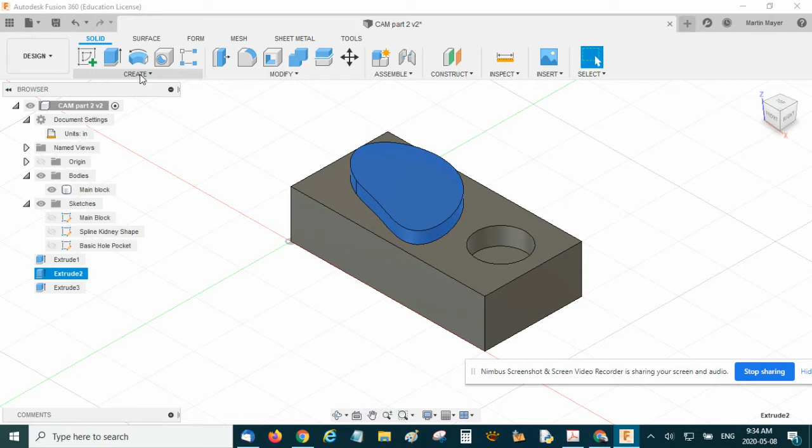to do the simulation. On the top of the block, I did this extrusion. To do that, all I did was go into, where is it? Sorry. I went into here, and under sketching, I used the spline tool. You could just click around, and I just made this funny kidney shape just for something different. So I could do that. And then I did another sketch. Oops, somehow I got that one. I didn't want the final sketch. And then I just put a hole in it over here.

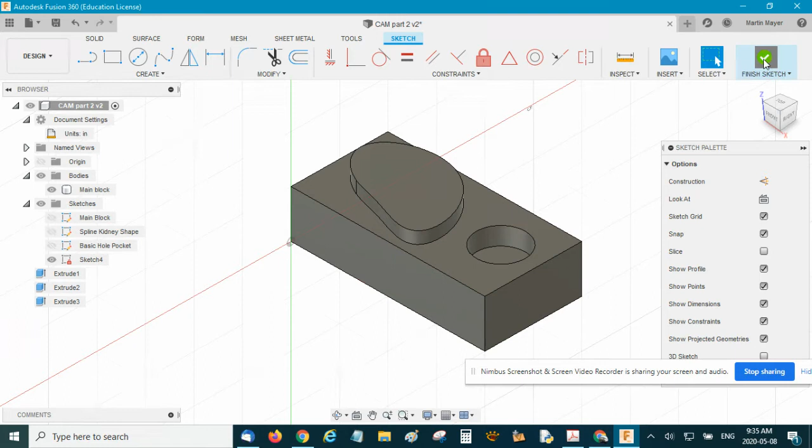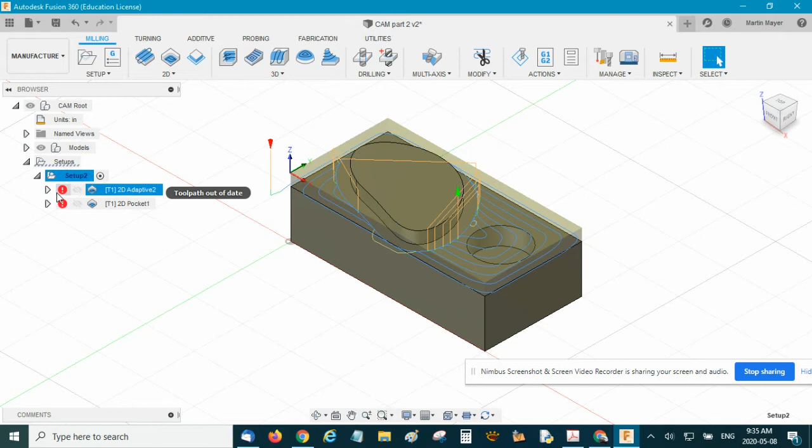So something raised out, extruded out, and something extruded in or cut in. That's it. Because I wanted to show some different types of machining in the CAM features, I made something going in and something sticking out. Go down to manufacturing. I've already set it up. It looks like I have some errors. I probably have to regenerate.

Reminder, in the manufacturing, you're looking for the CAM part. They call it manufacture, but it's really the CAM part where you can simulate the machining. You have to go do a setup, so I already did that. For now, we're not going to pick the type of machine, but we're going to do a milling operation, okay? And now you can sort of see, and I've got it, I think, set right. You see that shadow box? That's that stock box idea.

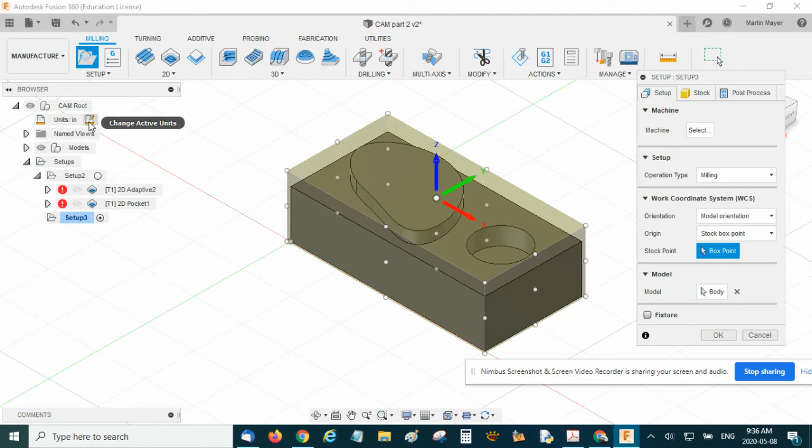Again, the final shape has all these features, but you'd have to start with a chunk of aluminum the size of that stock. And then we machine away all these things, and we get the kidney sticking out. And we keep machining, and we get that hole in here. So that was the reason that I had that stock box set up. Remember, when you go into manufacture, you have to change the units into inches. Something I noticed when I was playing around, you could actually set the default, and it seems to stick. So I don't know why I didn't see that before, but there is a default, so when you jump in from now on, it is there.

Okay, so you have to do your setup like we did before. Set up your stock box. I said it wrong, I guess. My box is 4 by 2, so it's 4 inches long, 2 inches, and it was an inch high, but I extruded that up 1/4 of an inch, so that's why the height of my stock is 1 1/4 inch, that gray box, because that's the piece of material that I'm going to start with.

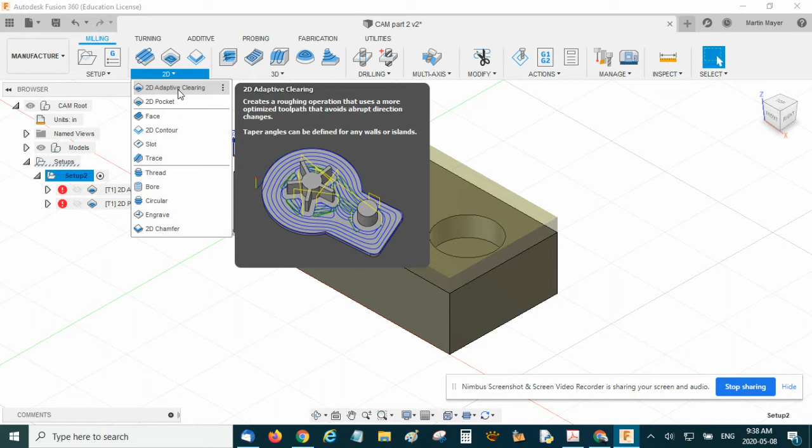Where am I? The next thing that I did is I went in and I set what I wanted to machine. So I actually did 2 of them, one for the kidney and one for the hole. And I went in here because I know I'm doing 2D machining. What I like about Fusion, when you hover over, it gives you a picture of what that kind of cut would do. So it's a little bit of a tutorial slapping you in the face. And I noticed right away they have this one called adaptive clearing. It creates a roughing operation. It just sort of clears everything out of the way that you don't want, so you can get into the shape that you want.

So that was the one I used to get my kidney shape. And then the pocket cut goes inside a shape, so that was the one I used down here. So you'll see them here, that 2D adaptive. You see when I hover over, it kind of shows you where it's going to cut. And then when I do the pocket, it shows where it cuts. So when I clicked on here, if you chose it, you would get this box to pop up.

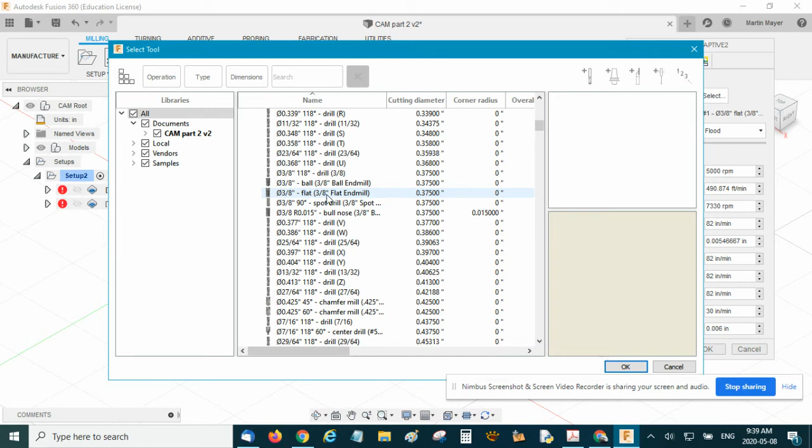This tool thing is kind of weird. If you go to the whole library, there's so many tools there. But basically, it's sorted by size. And I went down and picked around a 3/8, and I think it was here, a flat end mill, 3/8 diameter. See that little diameter symbol? 3/8 flat, diameter. A ball end mill has an end here; you can see that it's like a ball. That's not what we want. Flat end, I want the flat. Okay, so I had already chosen it here, and it shows it with the tool holder in place.

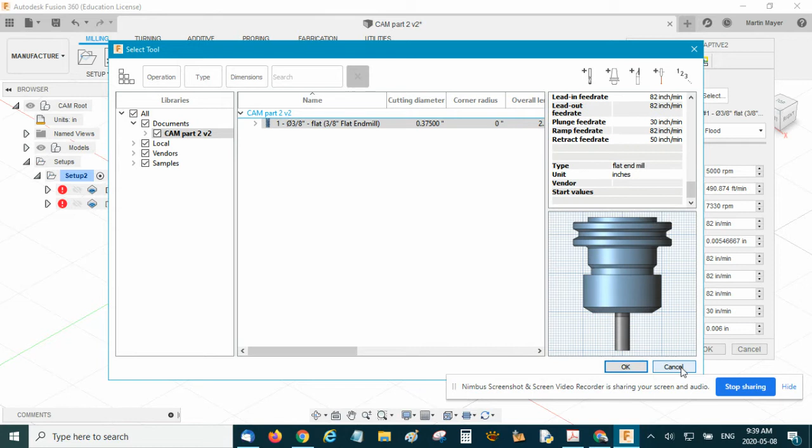And all of the parameters for it, you can play around there, but I didn't bother. I set my spindle speed for 5,000 because that worked nicely for the Tormach machine in our classroom.

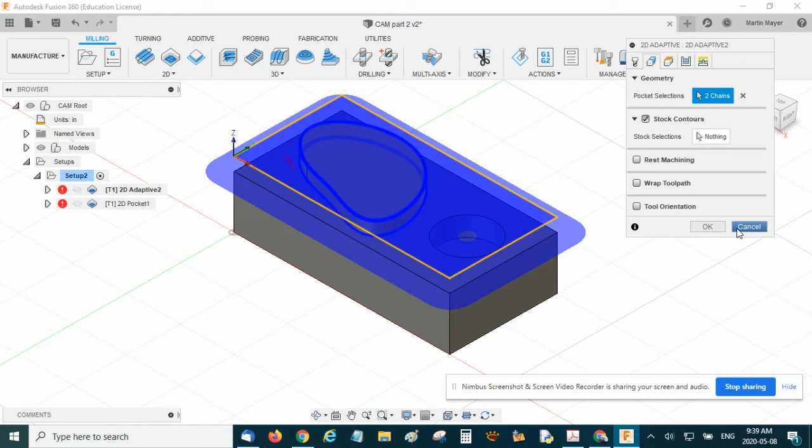Geometry, again, I picked the geometry and I used the stock box idea, what I wanted to cut around. So you can play with that. Again, I'm not an expert at it, but it's kind of a finicky thing, but it did work.

Once I had the parameters set up, I ran the simulation. In the simulation, you don't have to, but I like my tool to be transparent, kind of just softens it up. And the stock, I had it show, so when you click that, you see the stock box. That's the piece that you would start with if you started in the shop.

And then material, like the ceramic - I played with it, somehow the ceramic looks better. And colorization, I thought the material colorization looked better. If you like the colors, you can do that, doesn't really matter. And I made it transparent so I can kind of see the features I'm hunting for. They're in there, I remember what they're at.

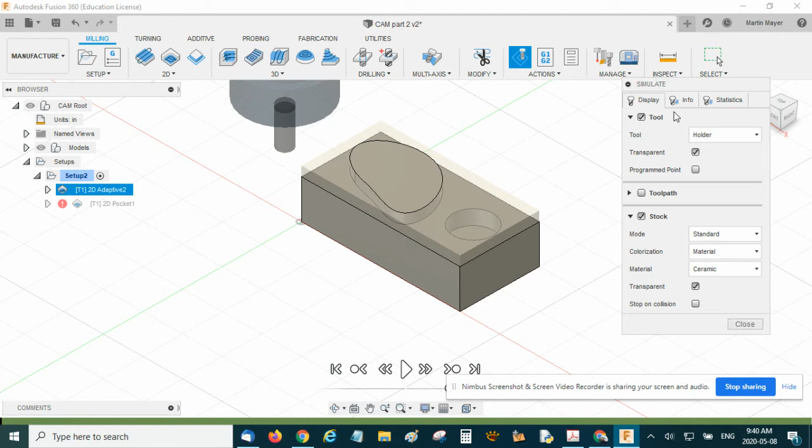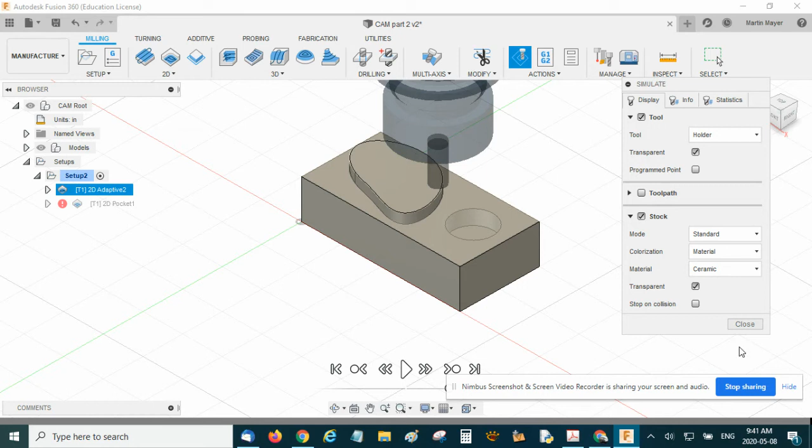When you're in the simulation, you can cut, and it kind of shows, like VCarve, oh, that material is disappearing as you go. And then when it's done, presto, there's my kidney shape sticking out, and that stock material has been machined away. Okay, so that's a kind of a neat way to see that. I think I have an error here because I didn't regenerate after coming back.

The last thing I want to show, I'm not going to show you how I did this, I'm going to let you figure that out. I'll give you a clue: make sure when you do your pocket cut, you go right to the bottom of the pocket. The first time I did it, I picked this circle and I only cut to there, it didn't actually put the hole in. So I had to go back and modify - I want to cut down to that contour in the pocket.

So watch that. For this toolpath, I'm going to do one more thing. There's a feature here called post-process. Remember we talked about that with VCarve, the idea that you're going to send your file on through a post-processor, a translator, and that's going to convert it into the G-code.

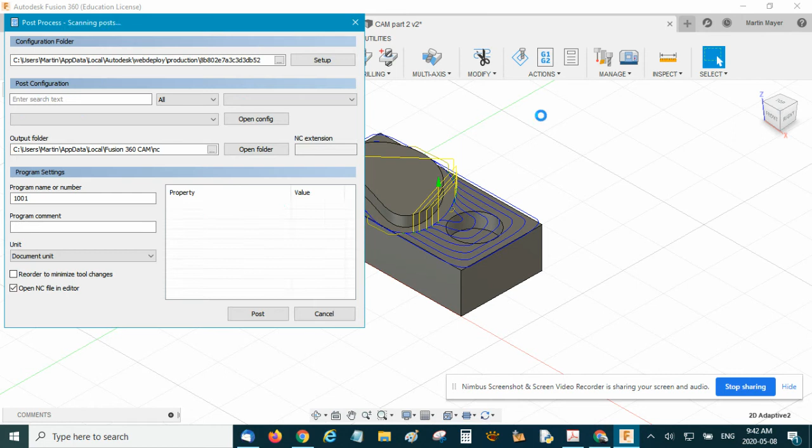I'm not an expert at this, but in the post-process, you can set where the file is going to go, and then post-configuration. I went here, there's all the different types of machines that are available. Well, we're doing a milling machine. And under here, all vendors, meaning all the different kinds of companies that make milling machines.

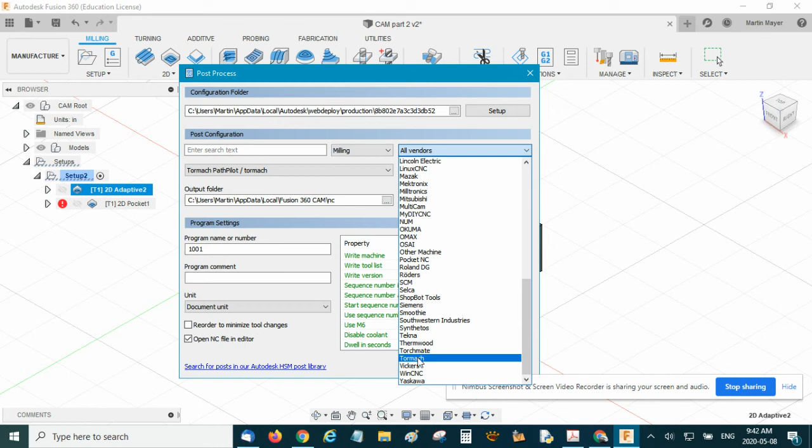And there's Bridgeport, used to be a big player when they made them years ago. But way down at the bottom is the one that's in our school, it's called the Tormach. So that's the post-processor that we want.

It goes to this folder, and right here I put in TMJ Mayer first try. It's going to make a CNC G-code file in this funny folder, this extension. Remember in VCarve the extension was TAP, a TAP file. It's just different, that's all.

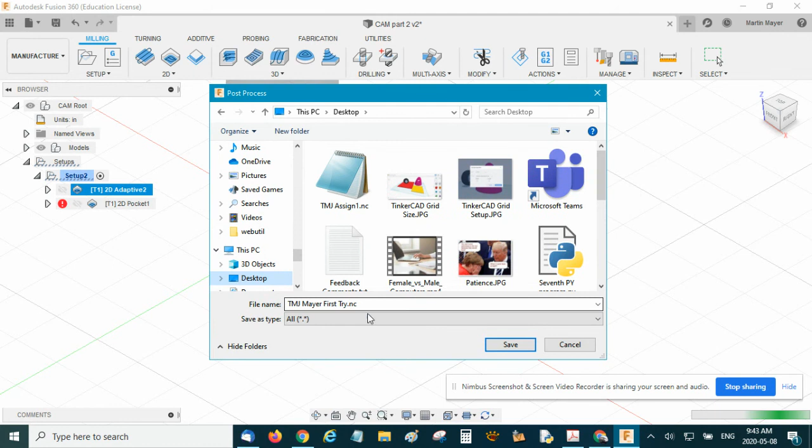I think this is it, but last time I did it, something popped up to check the save-as file. So yeah, this popped up. It seemed kind of weird that it had all those settings. So then I kind of cheated and I said, I'm not going to go hunt all the way into those folders, I'm just going to pop it onto the desktop. There's my name, .nc, hit save.

There is a feature - it was checked, I didn't show it, but it will automatically open it up in WordPad. I think you could change it to Notepad or something, but presto, there's my G-code file. It's quite a long one. Is it absolutely correct? I'm not sure. I'm not sure this is the proper Tormach post processor for our classroom, but that's a small problem.

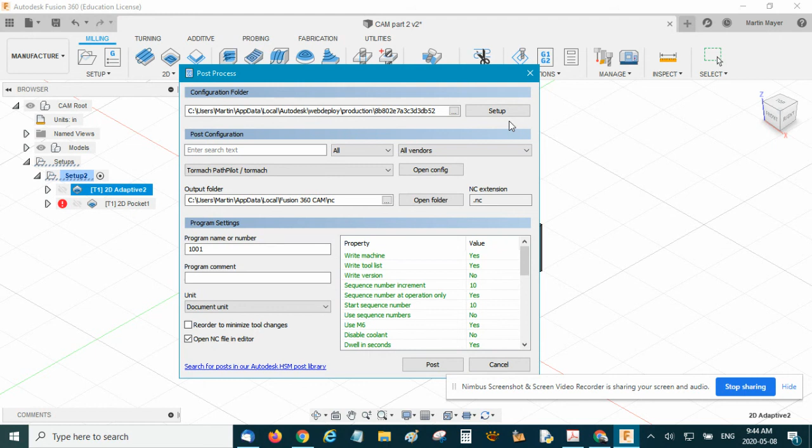We can sort that out another time when we're actually in the classroom, but the idea is it actually worked. If you go under here and post process, you will see these features, and then it pops up in the folder that you set - oh, there it is there. Open the NC file in an editor. I'm not sure how it knew to use WordPad and not Notepad, that doesn't really matter, it opens it up somewhere. There's probably some setup for that.

Okay, so just to recap: make a simple design, got some shapes, something unique, something different. When you've got that set, make sure you're in inches, make sure you know the dimensions of your block, because you need that when you jump over to manufacture. In here, under setup, you want that stock box, that sort of ghost shape that you would have before you start your shape. Then you set up the types of toolpaths that you want, depending what you're trying to do.

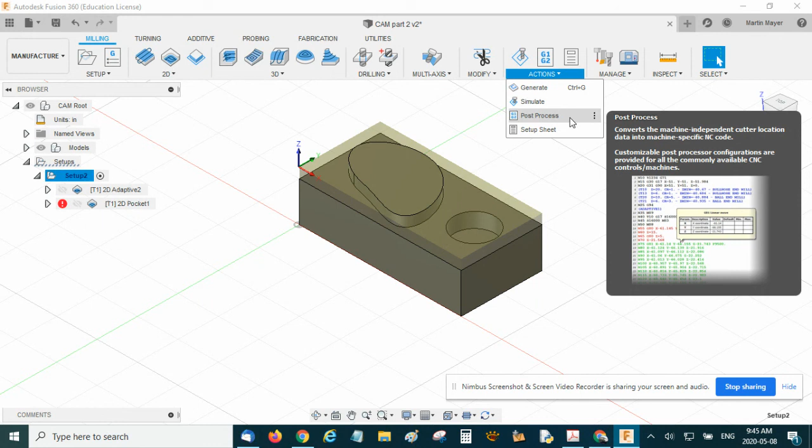Set them all up. When you're done that, you can run your simulation, see if it actually does what you thought it would do. And when you're done that, what you really need is the G-code, because that code will actually make the machine do the work. That's it, I hope it makes sense. Give it a try.